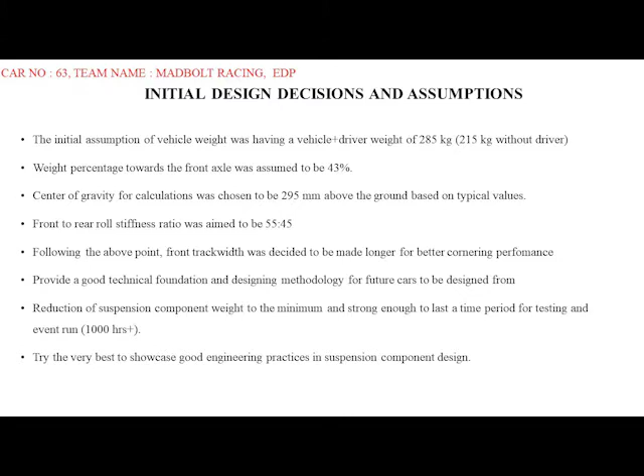Here we can see the initial design decisions and assumptions made by the team. An important initial assumption made by the team was that the vehicle would weigh 285 kgs combined with the vehicle and the driver. Other important decisions and assumptions can be found on our report. If you could please refer to it.

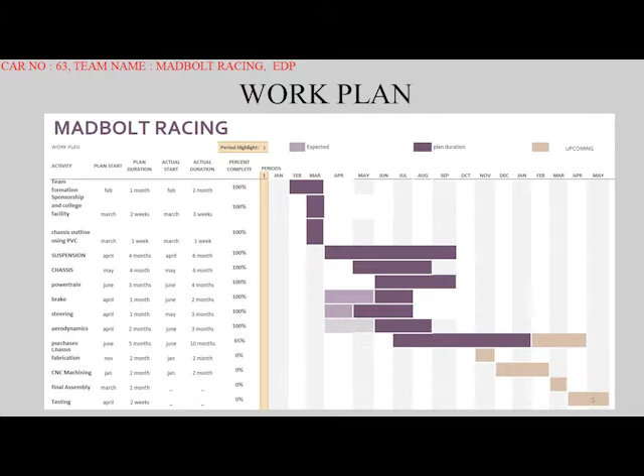Now we can move to the engineering design presentation of each department. Now let's go to the EDP slides of chassis department of Team Madbolt Formula Racing. Starting by the introduction. Since the chassis ought to support all the various departments of the whole vehicle, the chassis design is deemed one of the most important sections to be handled with care.

The cockpit design is of great importance and has to consider the 95th percentile male rule, and the chassis design must never compromise driver safety at any condition. The chassis constructed must have the required minimum stiffness, strength, and torsional rigidity, and must be highly reliable and safe.

Now let's move on to the next slide, which is concerning methodology, which is divided into 7 irreplaceable factors that must be satisfied by the overall design of the chassis. They are: the chassis must be made according to Formula Bharat rulebook, and any deviation from the rule leads to failure in the design. It must be aimed at decreasing the overall weight and must never compromise the minimum quality of the chassis, which will affect the other departments to a greater extent.

The center of gravity must be as low as possible, and it must be designed with relevance to its manufacturability and serviceability. The maximum safety of driver is given utmost importance while considering the overall design of chassis. Proper spacing for engine and drivetrain components is done, and the overall designing must be in accordance with suspension points.

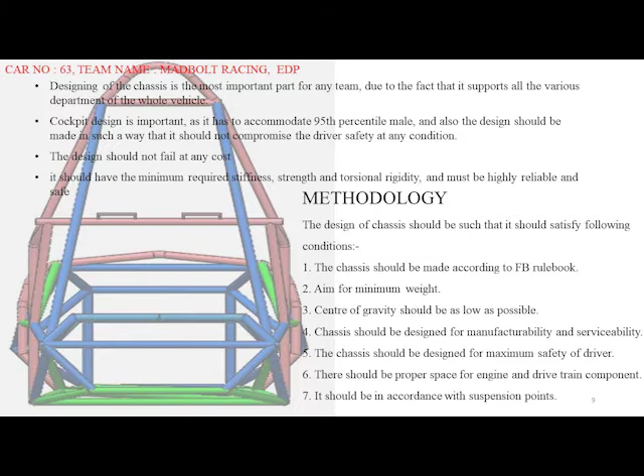Now concerning the material selection, or why we choose AISI 1020 for the overall design, various chemical, physical, mechanical and other factors are also considered. Most importantly, AISI 1020 has low hardenability properties and is a low tensile carbon steel with Brinell hardness of 119 to 235 and tensile strength of 410 to 790 megapascal.

AISI 1020 has high machinability, high strength, high ductility and good weldability. It is highly resistant to induction hardening or flame hardening due to its low carbon content. AISI 1020 will never respond to nitriding due to its lack of alloying elements. The chemical, physical and mechanical properties are fully backed up in tabular form in the slides.

Further concerning machining and weldability, in cold drawn or turned and polished condition, AISI 1020 steel has high machinability and it can be used for drilling, turning, milling and tapping operations. Also, AISI 1020 has better weldability in cold drawn or turned and polished conditions. Hence why we chose AISI 1020.

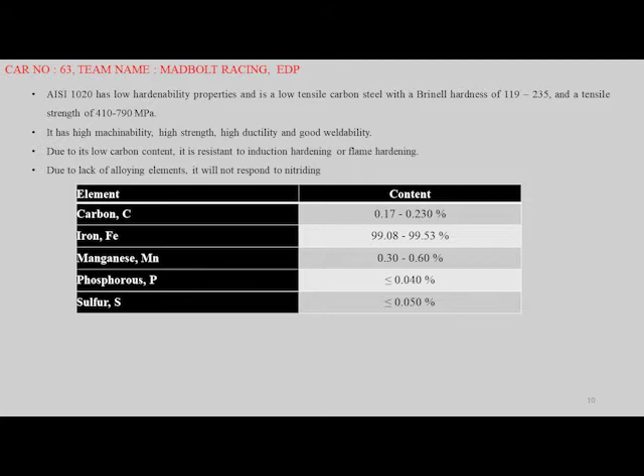Now let's move on to the analysis part, which is done using ANSYS through subsequent iteration. The front, rear, side impact and torsional rigidity analysis are done and explained in the report. But taken into the constraint of time duration of the presentation, let us move on to the torsional rigidity of front and rear chassis. The maximum equivalent elastic strain, equivalent stress and total deformation concerning front torsion analysis of chassis are

0.0028643, 557.68 megapascal and 2.3262 mm respectively. And also the maximum equivalent elastic strain, equivalent stress and total deformation concerning rear torsion analysis upon the chassis are 0.002557, 498.51 megapascal and 2.5708 mm respectively.

Finally, proceeding into the calculation which is provided in the report, concerning front torsion analysis, the torsional stiffness is found to be 1177.008 Nm per degree, and concerning rear torsion analysis, the torsional stiffness is found to be 1145.4247 Newton meter per degree. Hence, in conclusion, the torsional stiffness percentage acting on the front to the overall is 50.67%. And hence, we come to the end of the presentation part for chassis department.

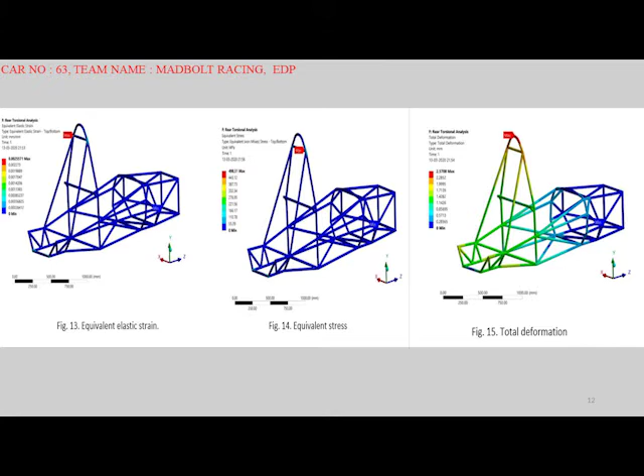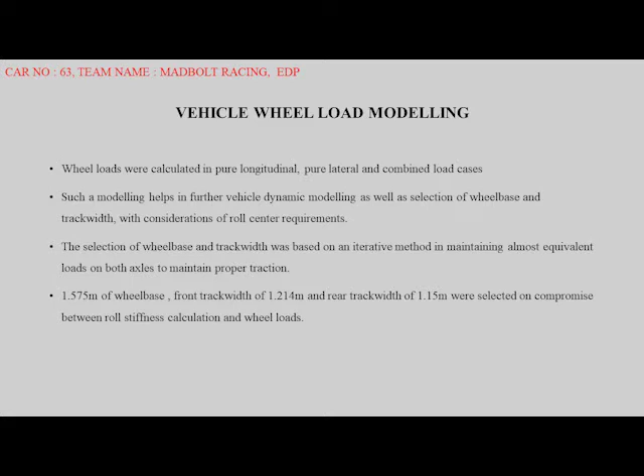We started our design by conducting a vehicle dynamic modeling, specifically the wheel load modeling for 3 different cases: pure acceleration and braking, pure cornering and combined loading cases. Such a modeling was done to finalize the wheelbase and track width of our car. For this year's car, we have selected 1.575 meter wheelbase, 1.214 meter of front track width and 1.15 meter of rear track width. This has been based on the equivalent wheel load distribution and the roll stiffness requirement for our cars.

Next we move on to the tire data modeling for our car. We used modified Dugoff model due to its modeling simplicity and result accuracy. The modeling acts as a basis for the other vehicle dynamic models.

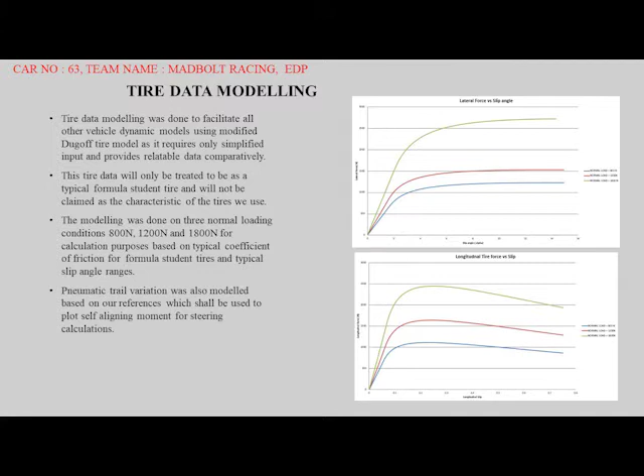Next we conducted a point mass lap time simulation on Optimum Lap to base most of our vehicle dynamic model. Our car, which was modeled after the initial design cases, was compared with a 600cc engine powered non-aero FS car obtained from the Optimum G Cloud.

Upon iteration, our car at 3.733 final drive ratio and the peak torque acting at 7800 rpm, our car was only 1.05 seconds behind the comparison in a German autocross track used.

We observed that our car averages at a 60 to 70 km range in the autocross track and the top speed of 93 km was attained in the final straight.

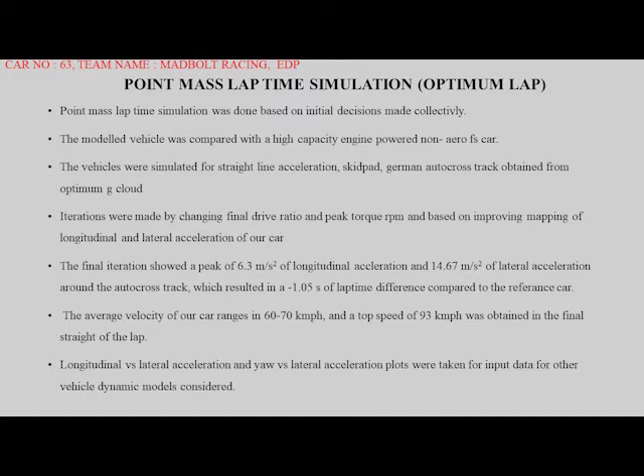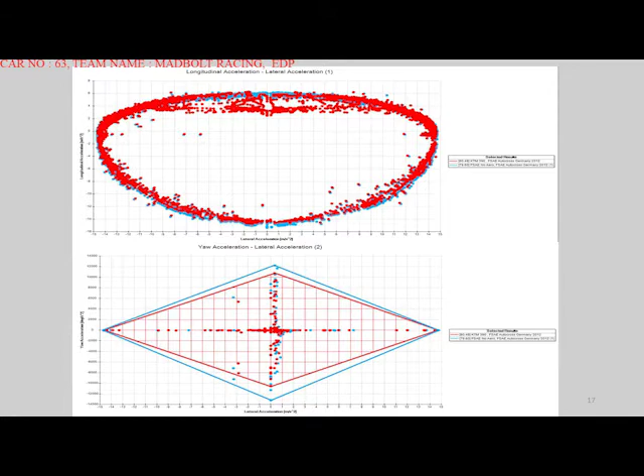Next, we modeled a linear bicycle model as a representation of the vehicle's yaw rate, CG slip angle, steady state cornering behavior and the tire slip angles. We considered 2 cornering cases of skid pad turn and 3.5 meter hairpin turn.

The input data for this model was taken from the tire data models, Optimum Lap outputs and a graphical modeling in SolidWorks. On the model state space representation for both cornering cases, 4.23 degree and 10.37 degree of CG slip angles were obtained for both skid pad and the 3.5 meter hairpin turn.

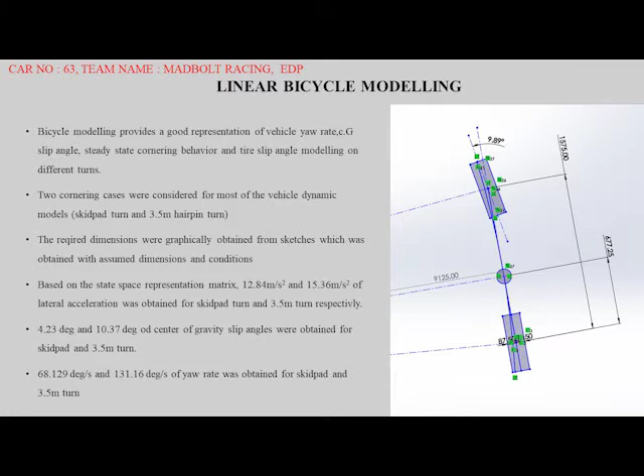68.13 degree per second and 131.16 degree per second of yaw rate were obtained for the above mentioned cases.

Moving on, we calculated the understeer gradient for the 2 cornering conditions, which was modeled using the tire data plots and the wheel load modeling for the cornering cases.

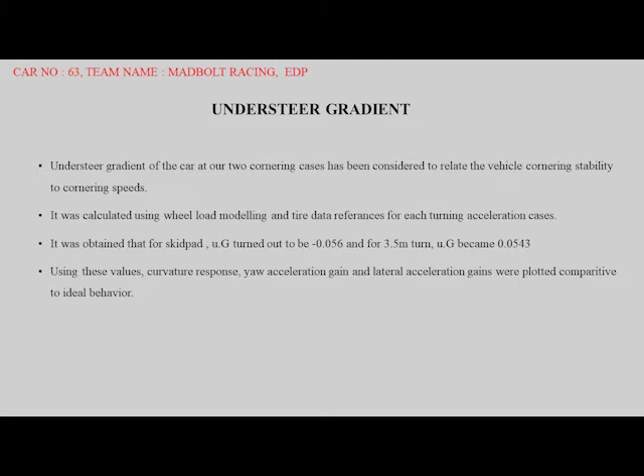Minus 0.0056 and 0.00543 of understeer gradient was obtained for skid pad and 3.5 meter turns respectively.

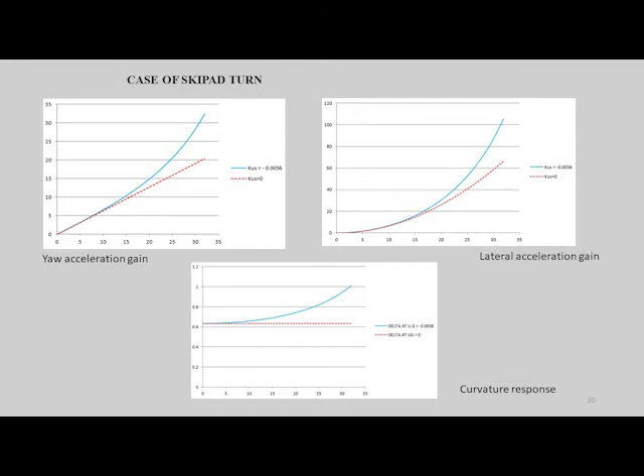Using these values, a curvature response, yaw acceleration gain and lateral acceleration curves were plotted, and the plots for the skid pad case are displayed in the slide.

Next, we plotted a Mimuro diagram for our car based on our vehicle dynamic models. This model acts as a base to compare the cornering behavior of our car to the cars we'll produce in the future. Both the skid pad case represented in orange and 3.5 meter turn represented in blue have been considered in the modeling.

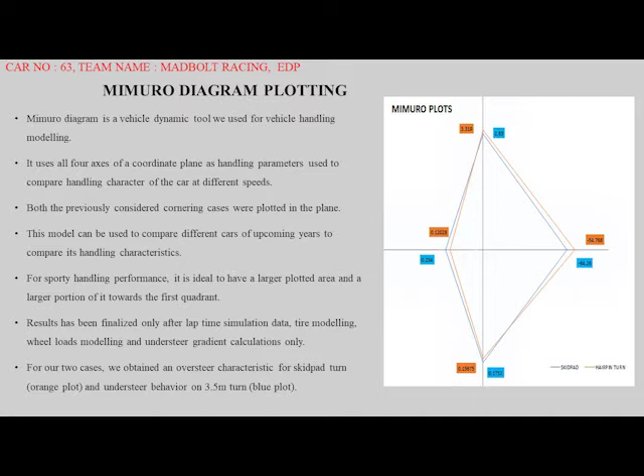Details of the graph parameters and the plot are described in the report.

Next, we move on to our suspension design. We start off with suspension kinematic modeling using Lotus Shark software. Our initial designs are explained briefly in our design report.

For both front and rear, double wishbone pushrod actuated suspensions were selected. The final iteration obtained 2.36 degree and 2.1 degree of camber front and rear and static toe of minus 0.36 and 0 degree front and rear.

The toe variation in bump and roll conditions will be in the range of hundredths of a degree after pointing the toe link towards the axle's IC. 30.5 mm and 51.26 mm of roll centers were obtained for both front and rear.

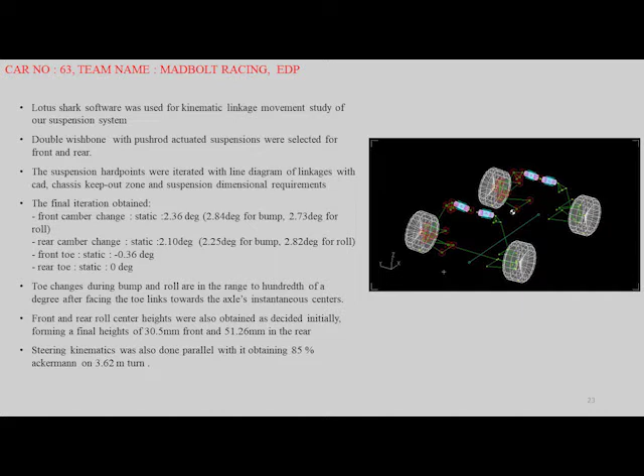Steering kinematics are also done with prior reference to our steering department, obtaining 85% Ackermann in its maximum turn radius of 3.62 meters.

Now we calculate vehicle rates and frequencies based on the wheel load models, and the wheel rates are selected as a compromise between maintaining 55% of roll stiffness to the front and motion ratio ranging near 1:1 and no bottom out cases on bump loads.

The obtained parameters are represented in the table after selecting a 300 lb per inch spring with a motion ratio of 1.12:1 at the front and 350 lb per inch spring with motion ratio of 0.98:1 in the rear.

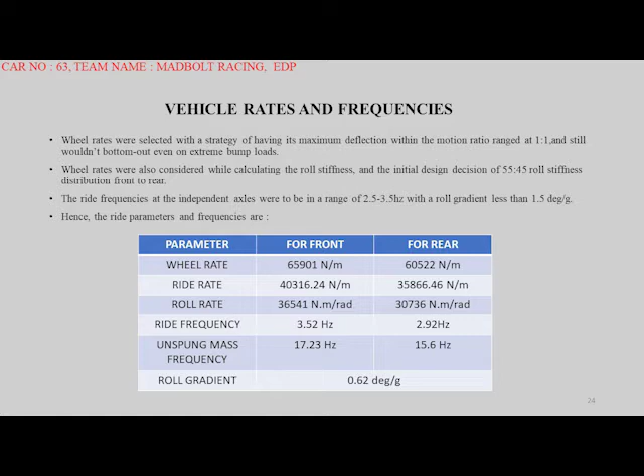Next, we graphically analyze the motion ratio variation in SolidWorks by plotting the hardpoint coordinates obtained from Lotus software. A trend of increasing wheel rate at the bump travel was preferred in the design.

The line diagram produced for front rockers and its motion ratio variation plots have been shown in the slide.

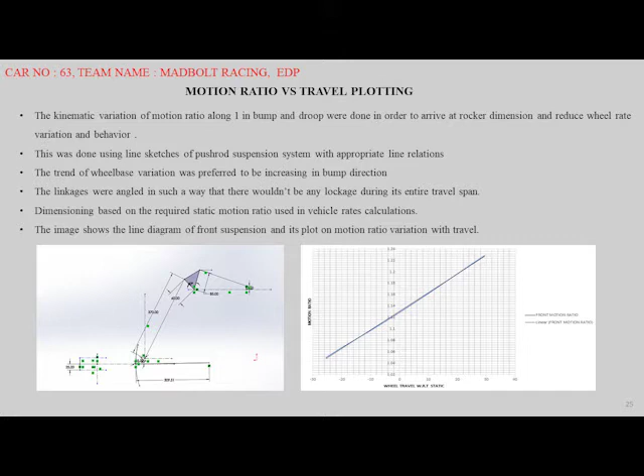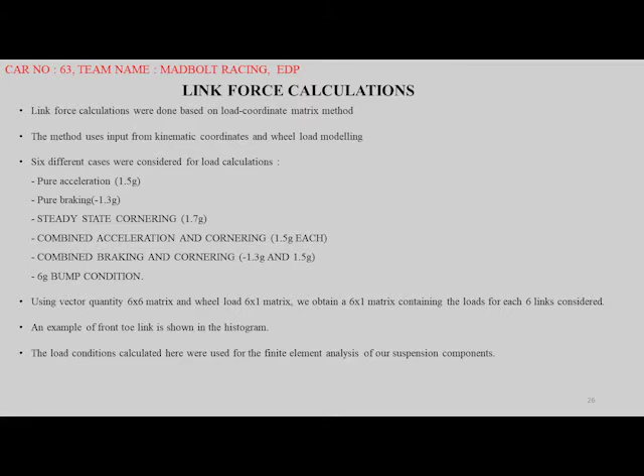Now we design and analyze our suspension components. We start with designing suspension linkages, which includes A-arms, pushrod and toe links.

AISI 4130 chromoly tubes of 19 mm by 1.65 mm has been selected after having more than enough strength properties for our design loads according to our material spec sheet.

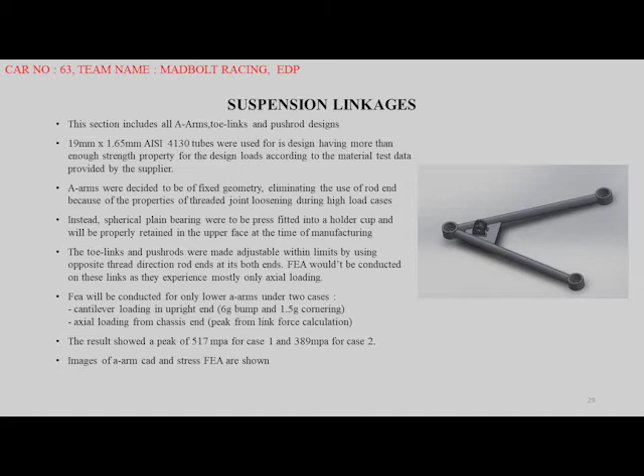Based on the calculation, the tie rod and the pushrod obtain mostly axial load, hence FEA was not conducted for the mentioned components. For the A-arm, FEA was conducted for 2 cases, including cantilever loading and an axial loading from the chassis end. Its FEA showed a peak of 517 MPa for cantilever loading.

Next, we designed the uprights, which were made to adjust static camber by changing the shim thickness of the UBJ. It is to be made from 7075 T6 aluminum due to its superior strength properties and lightweight aspect. FEA was conducted for 4G bump and 1.5G cornering, and 4G bump and braking conditions respectively.

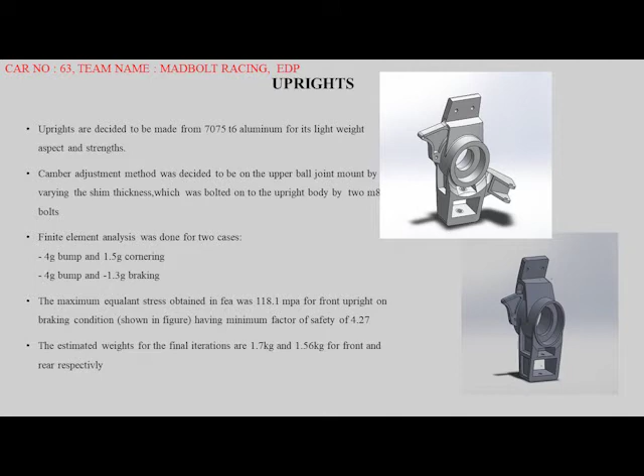The maximum equivalent stress obtained was for the brake caliper mount, for case 2 for the front upright, with a value of 118.1 MPa. The estimated weights are 1.7 kg for the front and 1.56 kg for the rear. The image represents the FEA of case 2 for the front upright.

Next, our UBJ brackets were designed after component collision considerations and bush spacings. For FEA, a load of 6G bump and 1.5G cornering has been given, and a peak equivalent stress of 382 MPa was obtained for the rear UBJ as shown.

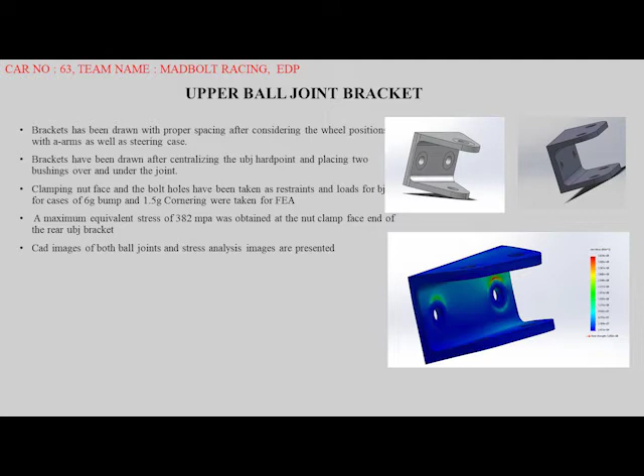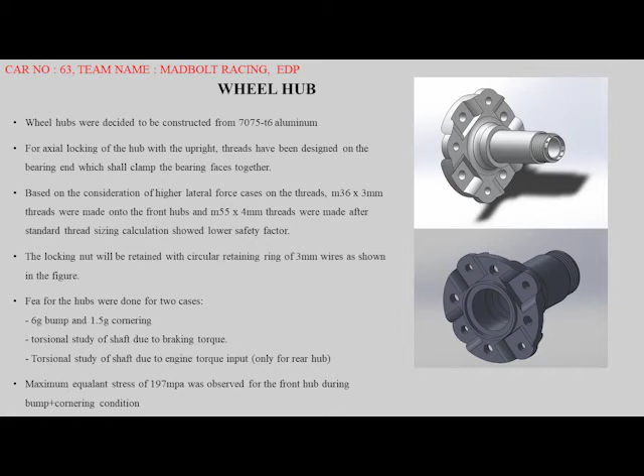Next, we design our pushrod rocker arms with dimensions obtained from the line diagram drawn before. The analysis was conducted for both extreme bump and droop cases, and a peak stress of 128 MPa was obtained for the front rocker. The weight of front and rear rockers are 258 grams and 265 grams respectively.

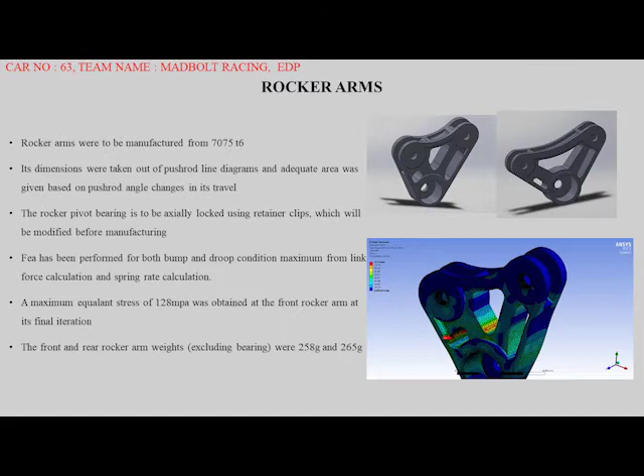Now we move on to the powertrain design, which will be presented by powertrain lead Sachin KCB.

Powertrain starts with selection of engine. Here we select the KTM 390 engine. KTM 390 is selected on the basis of its performance. It has a good power to weight ratio and is lightweight.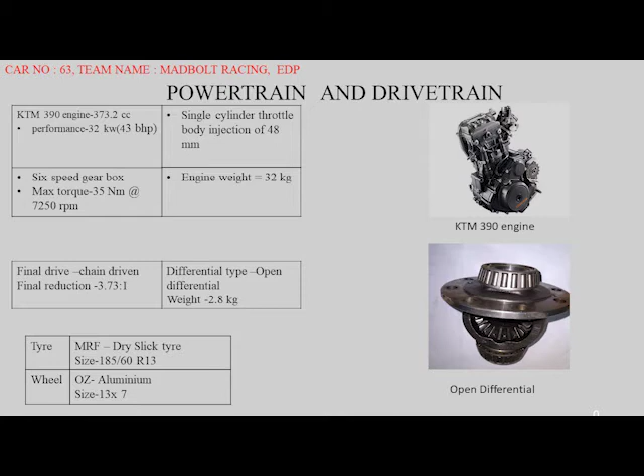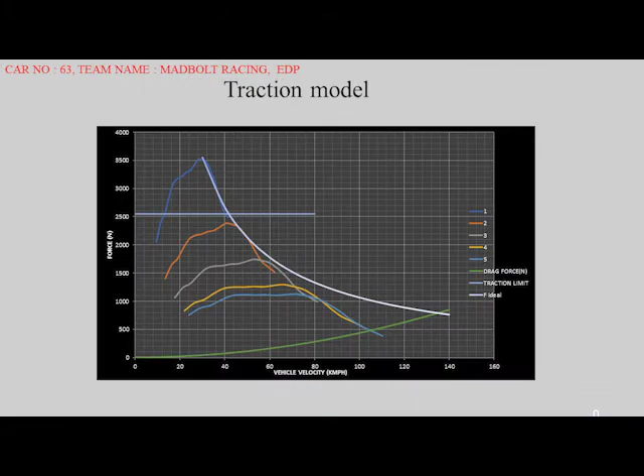Coming to air intake design, the first stage is throttle body selection. Here we use two throttle bodies, the KTM 390 throttle body and the KTM 125 throttle body. Reason for using two throttle bodies: at a certain point during throttling by the 390 TB, at an earlier point itself,

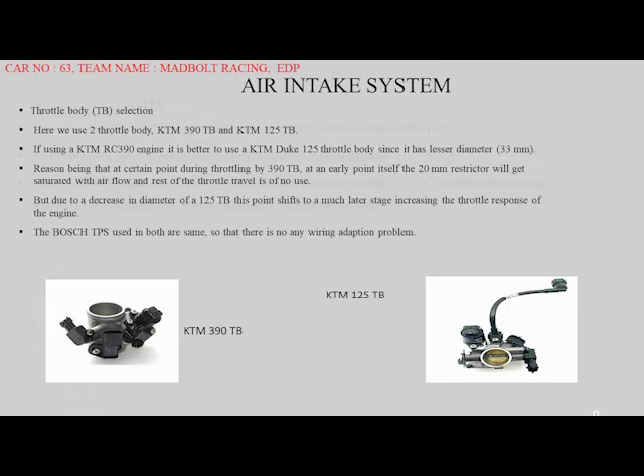the 20 mm restrictor will get saturated with airflow and the rest of the throttle travel is of no use. But due to a decrease in diameter of the 125 throttle body, this point shifts to a much later stage, increasing the throttle response. The Bosch TPS used in both are the same, so there is no wiring adaptation problem. The Duke 390 TB uses a junction between intake runner and intake port.

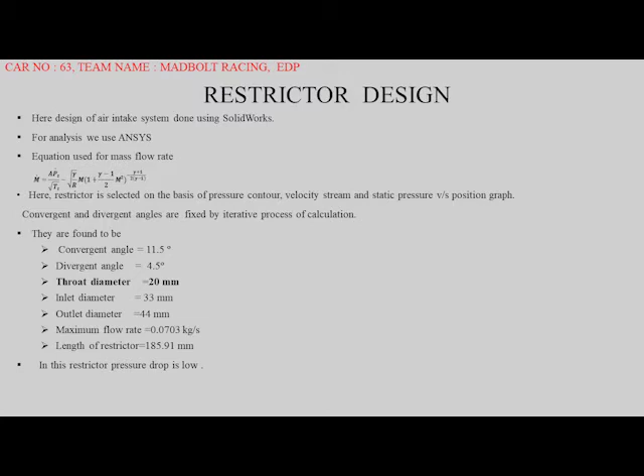The second stage of air intake design is restrictor design. Here the main design constraint for the restrictor is a 20 mm throat diameter. The restrictor is selected on the basis of pressure contour and velocity stream. Convergent and divergent angles are fixed by iteration method, and the values are given in the slide. In this restrictor, pressure drop is minimum. This is the pressure contour, static pressure versus position graph, and velocity streamline.

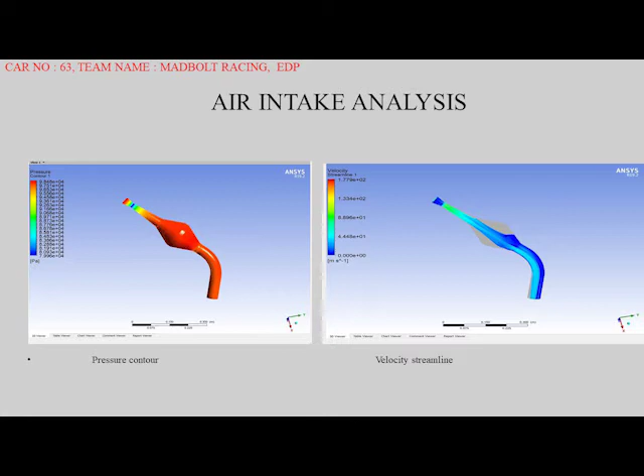The third stage of air intake design is plenum design. Performance of the engine at higher speeds improves with increase in plenum volume. Here we selected 1.2 liter, which is almost 3 times the engine displacement. We analyzed ellipsoidal shape, double frustum shape, and log shape. The double frustum shape plenum reduced vortex formation to a significant amount, so the double frustum shape is selected.

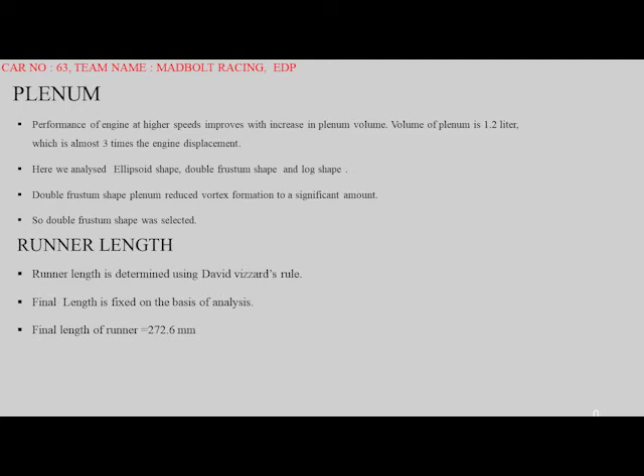The fourth stage of air intake design is runner length determination. Runner length is determined using David Vizard's rule, and the final length is fixed on the basis of analysis. Final length of runner is 272.6 mm. Header length is determined using an equation and is fixed on the basis of analysis, and the header length is 541.02 mm. Here we use a generic free flow muffler to reduce noise.

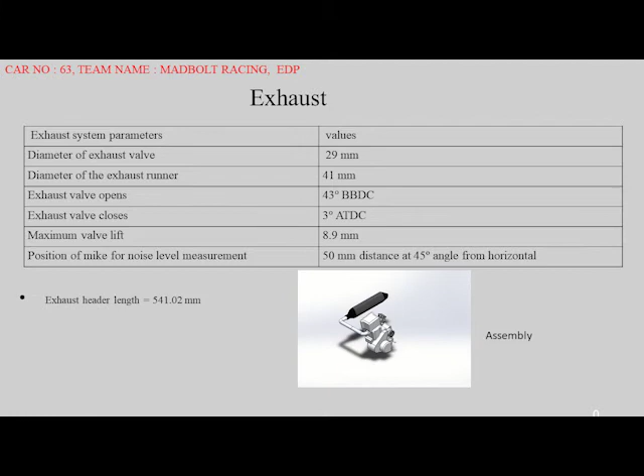The radiator is a type of container which has multiple tube-like structures arranged in a way to pass air through it, and hence helps the coolant to cool faster. These tubes or fins are made of aluminium, which is a good conductor of heat and dissipates heat faster. They are mainly used to convert thermal energy from one mode to another for the purpose of cooling.

The types of radiators include single pass, double pass, and triple pass. Based on their types, we have the grill tube radiator, tubular radiator, and the cellular radiator.

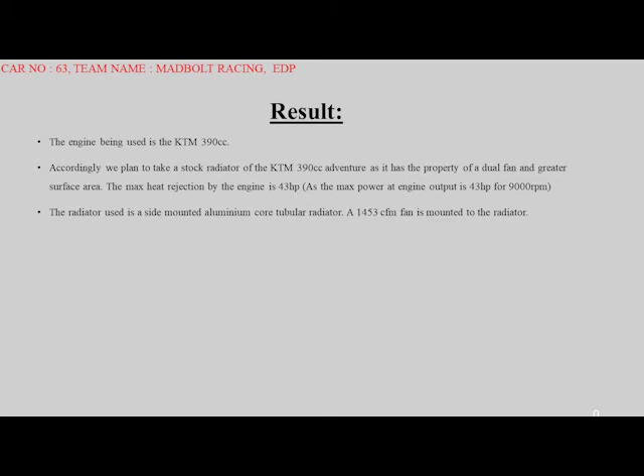From here we are going to find out m, or the flow rate, and we obtained it to be 1453 CFM, cubic feet per minute, which is the amount of airflow required to remove 43 horsepower of heat. From these calculations, we plan to use a stock radiator of the KTM 390cc Adventure as it has a dual fan and greater surface area. The max rejection by the engine is as calculated, and a 1453 CFM fan is mounted to the radiator.

Hello judges, this is Kiran here to give you an insight into our steering system. Since this was our first time entry into a Formula event, we didn't want to do any experiments, so we went straight into taking Ackermann steering as suggested by a lot of people and journals.

A lot of software helped us in many ways, and the suspension team provided us with all the coordinates and values necessary for the steering system calculations. From there we moved on to find our steering ratio, rack travel, etc. We obtained a steering ratio of 6:1 and a rack travel of 68 mm.

After that, we went straight on to machine a customized rack and pinion. Then we moved on to the shafts and universal joint section. We had plenty of problems placing the shafts and universal joints properly since our rack was kind of close to the front hoop.

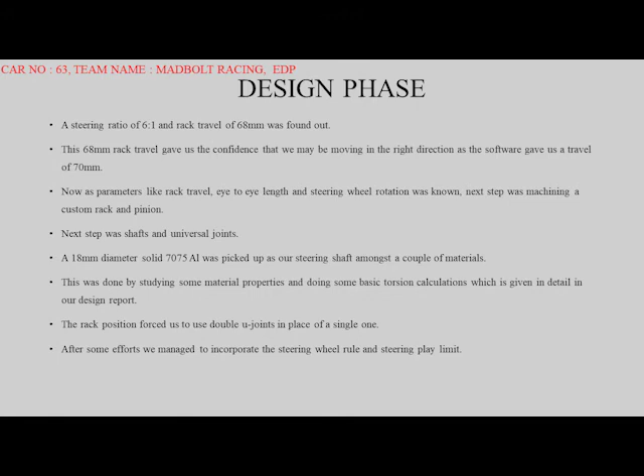In this figure named steering shaft position, you can see how we aligned our shaft and universal joint systems. The next figure shows the rack placement, which is approximately 76 mm from the front hoop. A 10-inch steering wheel was used based on the steering effort calculations.

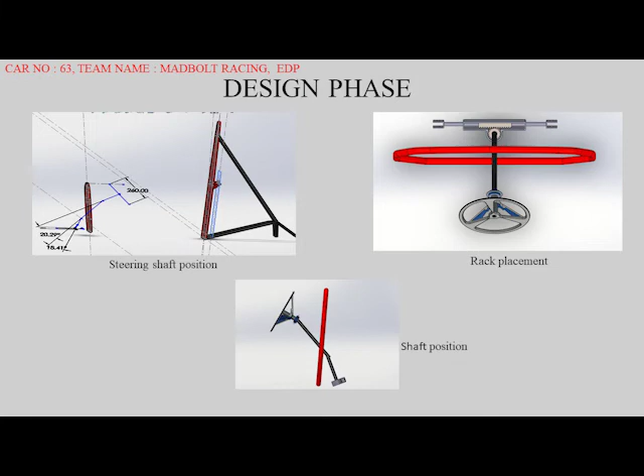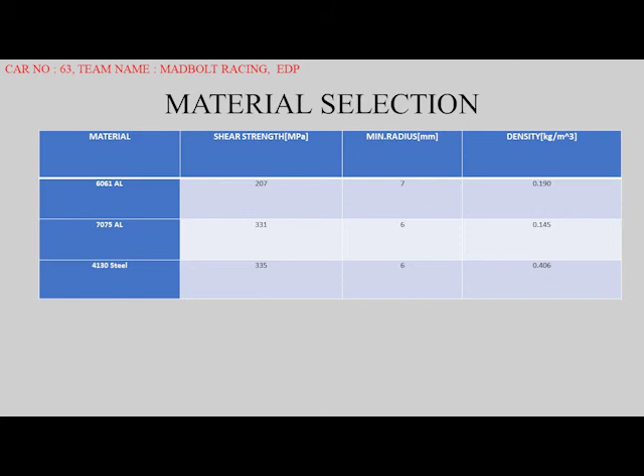Material selection: this table represents the material selection of our shaft. We decided to use 7075 aluminum since it had more shear strength than 6061 aluminum but less density than 4130 steel. The design constraints included our rack position being a bit of a headache for us because it was way too close to the front hoop.

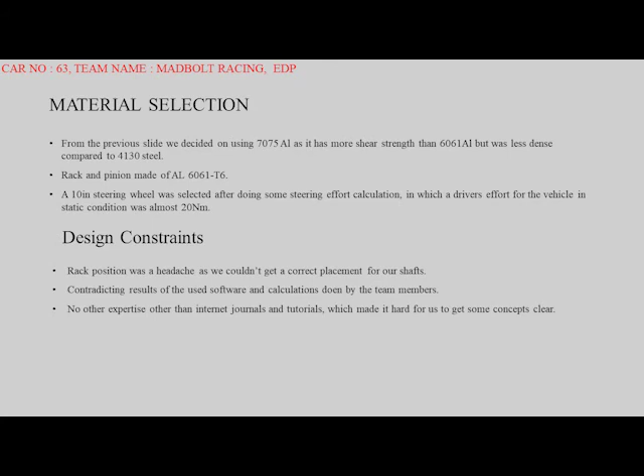So we had no way to incorporate just one universal joint to reduce the play, but after a lot of effort we managed to incorporate two of them and keep our steering play less than 7 degrees. All the calculations and theory based on this study can be found in our report. So that's it for steering, and now I move on to the brake system.

During the brake system design, all the expertise we had suggested that we use the tire data and reverse calculate our pressures and forces, but due to some first-time team limitations, we had to start by using the basic equations and work our way up.

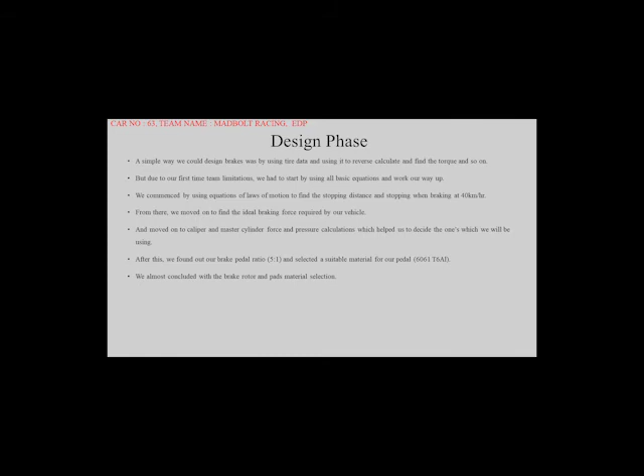This brought us to find the ideal braking force, which we equated to find the caliper piston diameter and master cylinder bore, which helped us select which ones to use. We found our brake pedal ratio to be 5:1 and selected a suitable material for our pedal as 6061 T6 aluminum. We almost concluded with the brake rotor pad material selection.

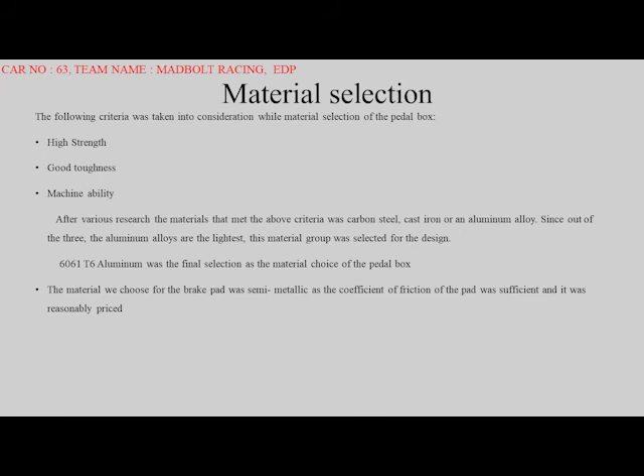Major restrictions for our braking system were that since the rim diameter was 13 inch, we had to fit our rotor as well as caliper in that gap, so we had to find a rotor such that it matches our hub design, and that was all.

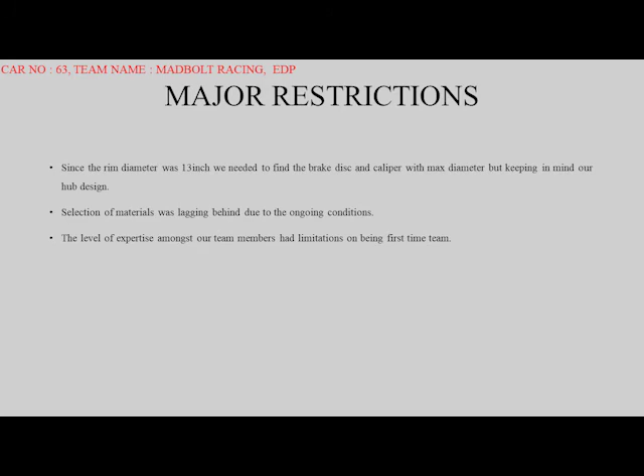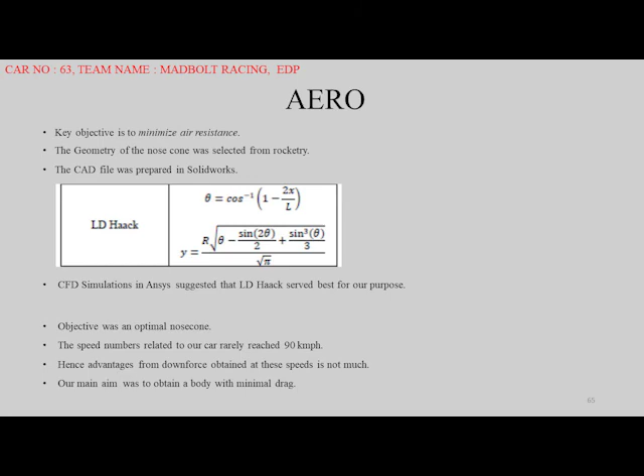Thank you. I am Joel Matthew Abraham, and today we look into the aerodynamic package of our car. Our key objective was to minimize air resistance. The aspect of increasing downforce was neglected since our car's maximum speed was 110 and our optimum speed would be 80, so downforce was not considered.

Then we had to look into a nose cone geometry which would provide us with the lowest drag force, and hence we went into the field of rocket science, where we got four main shapes and did a comparative study to obtain the final shape, which was the LD Haack with the lowest CD among all four, and CD was 0.447.

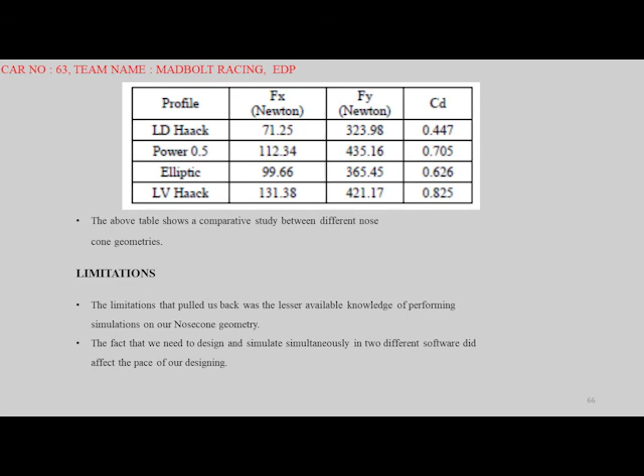The RANS model simulation was carried out on the model, and hence the result as told above. Then we made the geometry by making the shape of the Haack adapt to our rule book, and made another simulation, and we got our entire car's drag coefficient as 1.4275 and a drag force of 430 newtons.

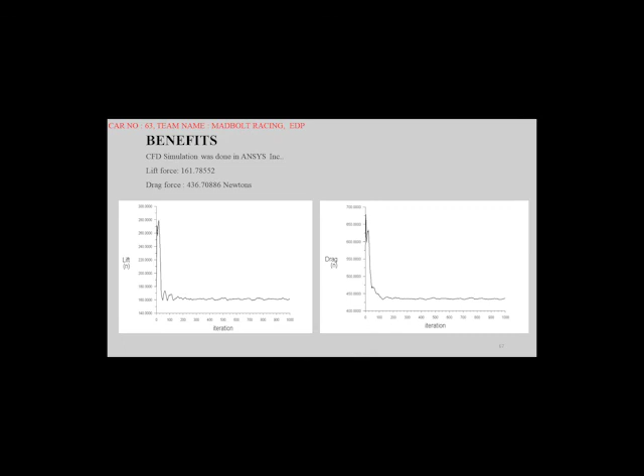In our simulations and our venture of designing, we did face some limitations due to proper software licensing and making the design meet manufacturability, due to lack of precision bodywork in our localities, and especially during these tough times, these were some hardships which we had as challenges on our fronts. And thank you.